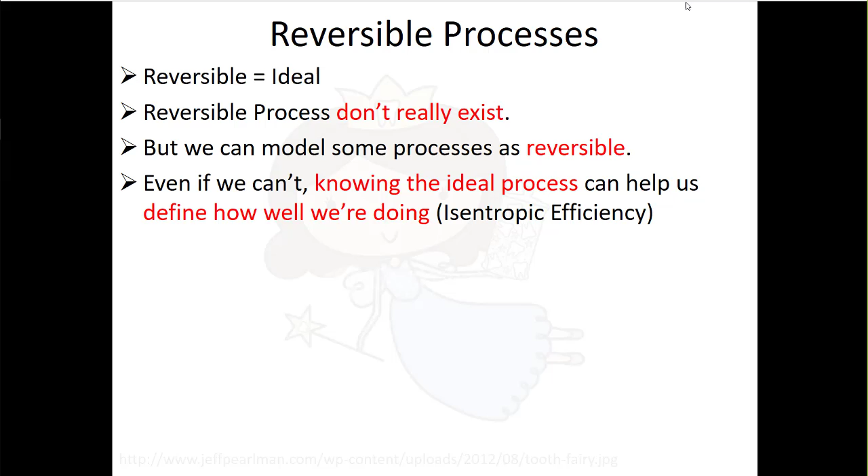We talked about this before, and we'll go through an example today where you might not think, when you calculate your thermal efficiency of your heat engine, that you're doing all that well, but you can't compare that number to 100%. You have to compare it to the ideal or the Carnot efficiency, which we'll talk about today.

We've been talking about the second law and how ideal processes are processes where that sigma dot, or entropy generation rate term, is zero. That's the best that can possibly happen, the thing we can approach but never achieve. That's the limit of what's possible.

But real processes, which are irreversible, have irreversibilities, things like friction that cause energy losses, and that's represented in the second law by this sigma dot term being positive. So anything that can happen in real life has a positive entropy generation rate.

In the last class, we talked about how that doesn't necessarily mean the specific entropy of the working fluid in your system is increasing, because you have to think about the entropy of the whole universe, which also includes the entropy accounted for in that heat transfer term.

And we talked about the potential difficulties with that heat transfer term, that you need to use the right one. It's the same heat transfer term you would use in the first law, but remember, it's Q dot over T.

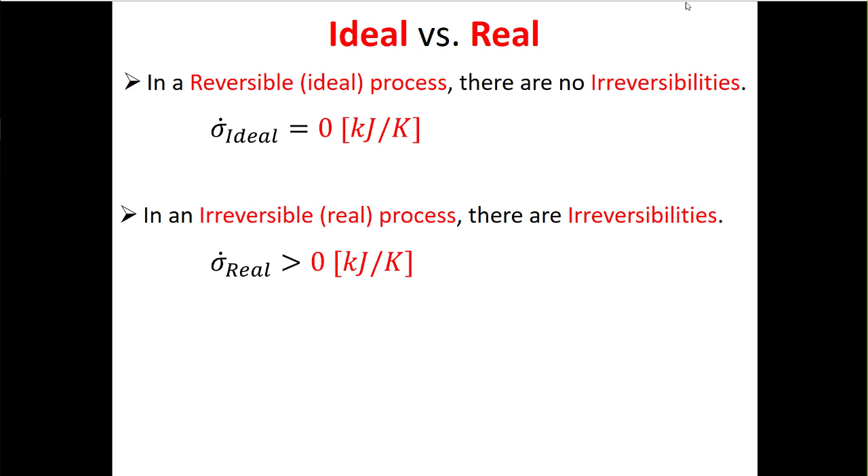There's two things you have to remember about that temperature. The first is that it's the temperature outside of your system. The second is that since it's not a temperature difference, it has to be in Kelvin or in Rankine.

So we talked about this idea of thermal efficiency, which we'll explore a bit more today. This is the idea that when you have a heat engine, you're trying to turn that input energy, which is heat, into another kind of energy, which is mechanical power. When we think about power plants, this is a spinning shaft attached to an electrical generator.

And the question is, how much of that input heat energy actually made it into this mechanical energy, this spinning shaft. So we can look at that.

This is actually W dot net over Q dot in. But if we do a first law analysis on the whole system, we can transform that into 1 minus Q dot out over Q dot in.

I can show you that when we do the example today. So this is going to be some number less than 1, because Q dot in is the biggest number in the problem.

And Q dot out, remember Kelvin and Planck told us, yeah, you can have a heat engine that's going to run for long periods of time in a cycle, but you have to cool that engine, otherwise it's going to fail. Like I said, unfortunately sometimes we see that on the side of the road where somebody's pouring a water bottle over their engine because they lost their radiator fluid or something.

Now there's a special case here. So this equation we can always use, this should say real and not ideal. But for ideal processes, we can make this substitution that a ratio of heat transfer rates can be replaced with a ratio of temperatures.

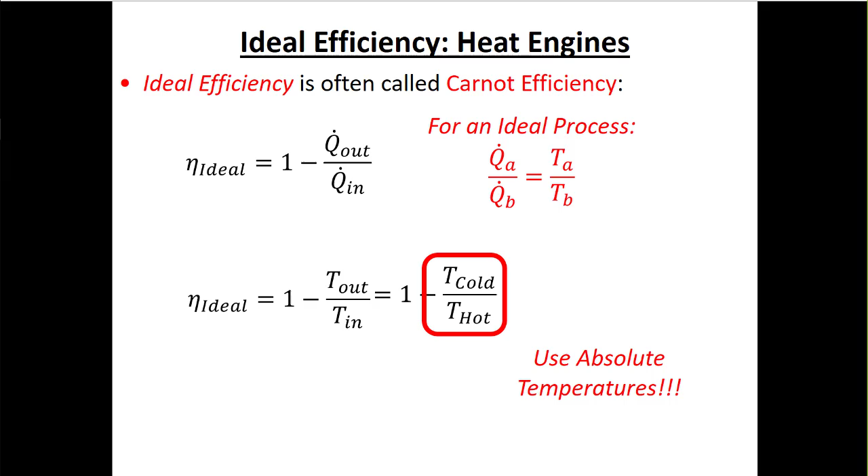We also talked about this idea of coefficient of performance, that we can use a similar methodology to look at devices that work in the opposite direction as heat engines. Heat engines were putting in heat and getting out work. Whether you're talking about a heat pump or a refrigeration cycle, the input is the work. You plug your air conditioner into the wall, and the energy benefit, the thing we're trying to do, is move heat either out of the cold place or into the hot place. So we're trying to move the heat in the opposite direction that it would go normally.

Now, you can remember, if you want, which Greek symbol goes with which. For heat pumps, we use gamma, and for refrigerators, we use beta. But if you want, you can always just write COP, that's coefficient of performance. The way that I remember this is refrigerator starts with the letter R, and if I squint enough, beta kind of maybe looks like an R. It certainly looks more like an R than gamma does. So that's how I remember it. It's maybe not the best way, but that's what I do.

Now here, because the energy cost is the net work, you would start with Q dot hot minus Q dot cold, but then we're making the Carnot assumption here, so these become temperatures. So this is the work term, and then for the heat pump, the energy benefit is heating up the hot place, so we put the hot temperature here on top. In the refrigerator, the benefit is cooling down the cold place, so we put the cold temperature on top.

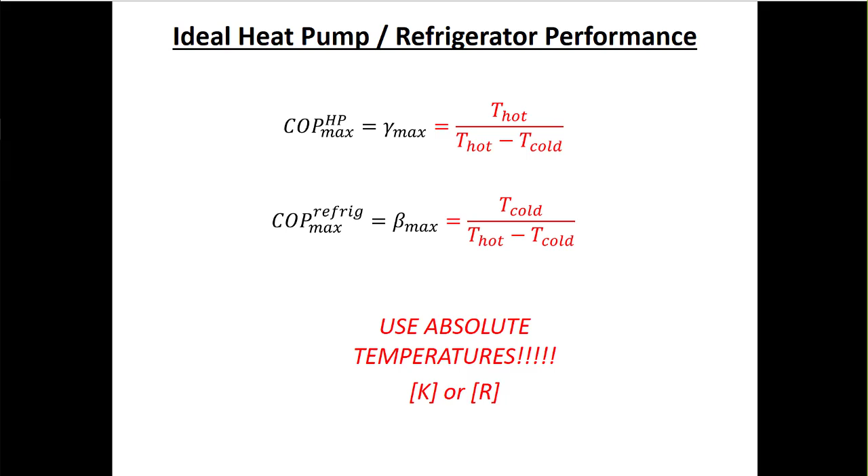So that's kind of just an overview of what we did last class. Now today, we're going to start to put this in practice, putting all the pieces together. Certainly as we get past the second midterm, we're going to start to look at cycles.

So I've been making this promise that what we're going to do in this class is really cool, because we're going to start to look at nuclear power plants and coal power plants and airplanes and all this cool stuff. And the way that we do that is by analyzing cycles like this, where we stack a bunch of thermodynamic processes together in series. So this is, I guess, the most basic version of a coal-fired power plant, and it's got 4 different components.

Remember, it's a heat engine, so we got to add heat. So here's where you're actually burning the coal. But there's this tube that's got water in it, and we're adding heat from this burning coal, and it's boiling this water, making it water vapor.

And that water vapor then goes into a turbine, because we know that there's this factor of 1,000 difference between the specific volume of liquid water and steam. So the steam wants to take up lots more volume than the liquid water, so it wants to expand.

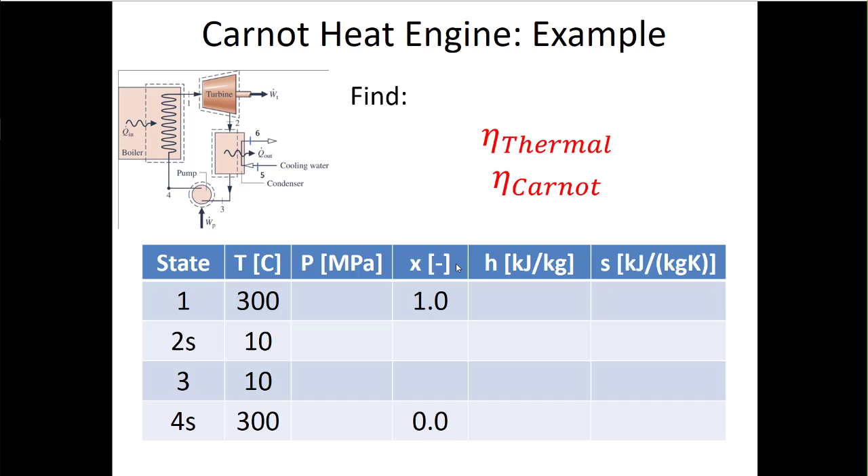So what we're asked to do is find the thermal efficiency of this system, find the Carnot efficiency of this system, and I'll also go through how we draw a TS diagram for this whole cycle, because that's going to start to be important for us.

Now, I won't do that in PowerPoint today. Today we'll go through this just in Word, right? So you'll see me actually work through the problem.

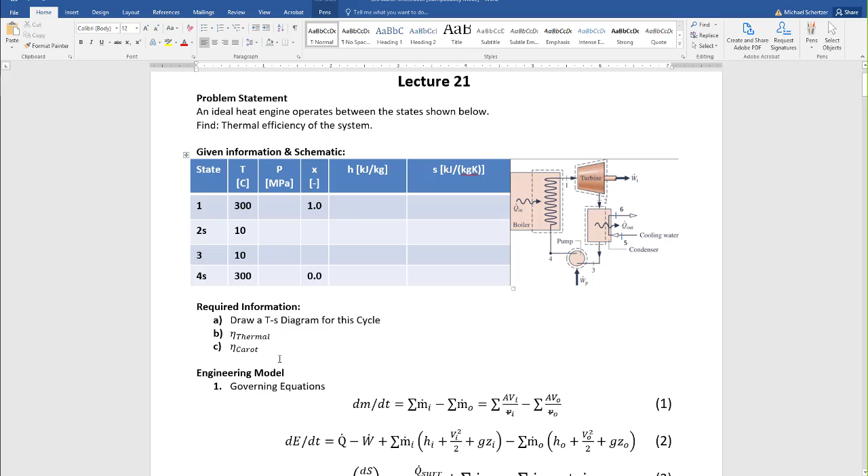Right, so this is the same information, we know some stuff here. So here I've got a state table with some information. I look here, I like state 1 because I have 2 independent intensive properties. Temperature and quality are always going to be independent. State 4S, I like this one too because it's also going to be 2 independent intensive properties. So I know I could fix those 2 states, but I got 4 states here.

So for now, let's just say that I look at this like it's an exam. I look at this and I'm like, oh my, I have no idea how to fix these states. But that's okay. Dr. Schertzer told me, if you don't know what to do, try to solve it symbolically. So we'll go through this symbolically first, and I guess first we'll draw the TS diagram, because then maybe that'll help us figure out what to do with fixing the states too.

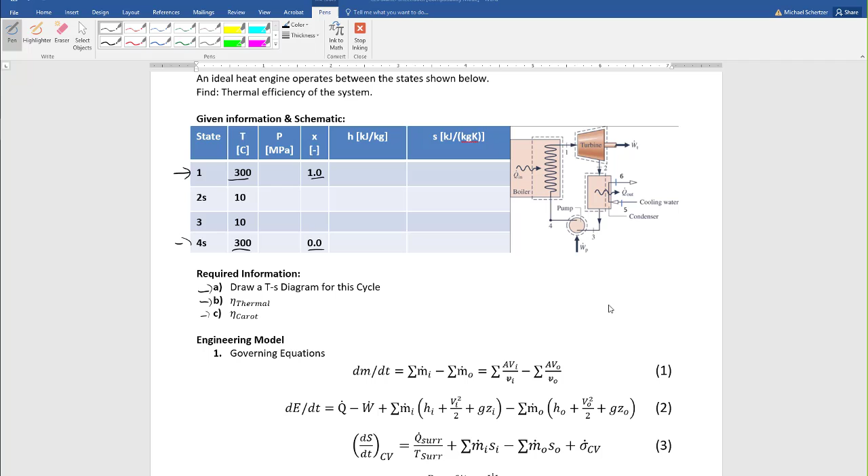Then we'll get equations for the thermal efficiency and the Carnot efficiency. And then if we have time, we'll fix the states and we'll get numbers. Now you can find those same numbers just in the lecture online. I think even in the Thermo Short, I have all the data there. So if you want to spend 10 minutes, if we don't get enough time, you can check that out too. 5 minutes if you run it at a higher speed.

So the first thing we want to think about is, what are the governing equations? So these are all the governing equations that we kind of know for open systems and cycles. So here we have conservation of mass, conservation of energy. We learned about the second law. We know something about thermal efficiency now, and Carnot efficiency. One thing that maybe I didn't mention yet.

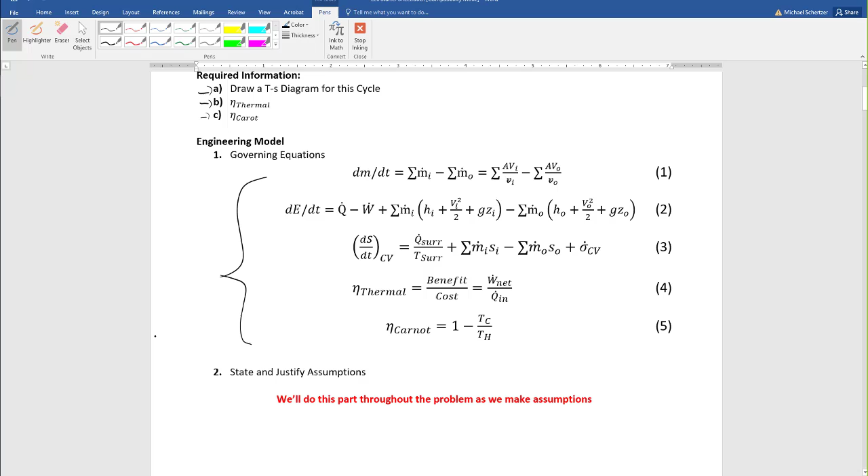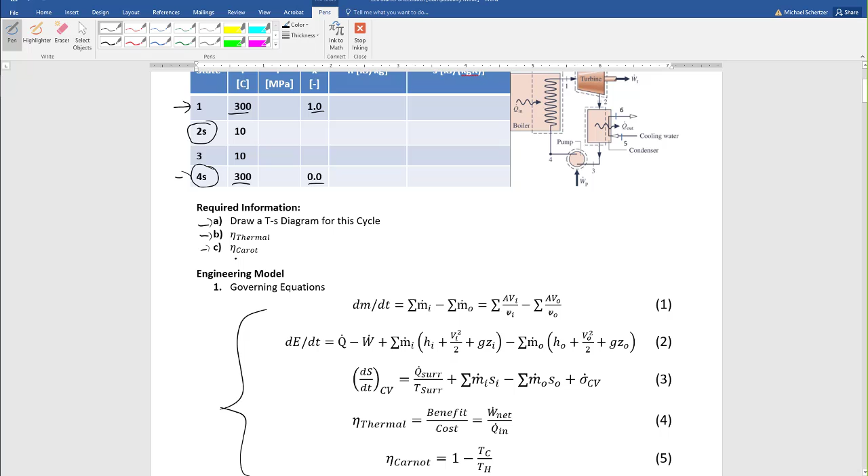Oftentimes when we don't have enough information on the state table to find everything, there's something about the process information that we know. So here there's a bit of a hint, because this says 2S and 4S, which suggests to us that they're isentropic. We'll go over what that means when we get there. But it also tells us that this is an ideal heat engine. So that must mean that for all processes, sigma dot is equal to 0, because for the whole system to be ideal, all of the processes must have sigma dot equal to 0.

So we can start. Now, this is pretty common on an exam.

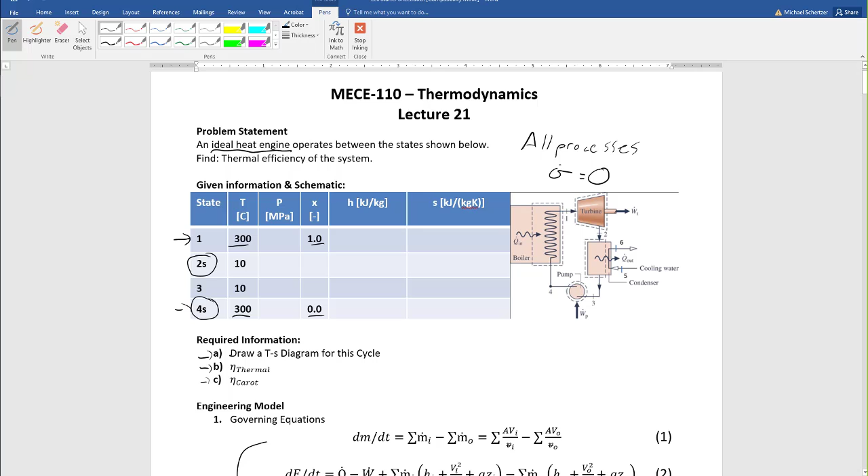You might be asked to draw a TS diagram for this whole system. So we'll start there, and I cheated a little bit because I already started here. The first thing when we draw a TS diagram, the question we have to ask ourselves is what's the fluid? The reason we ask is because if it's water, or maybe some kind of refrigerant where we're boiling it and condensing it, then we need to draw a vapor dome. But if it's an ideal gas, we don't draw a vapor dome. So here we know that the working fluid is water, so we have this vapor dome.

Now from here, I can see that two of my states, state 2s and 3, are at 10 degrees, and two of my states are at 300 degrees. So I've got my TS diagram, I drew my vapor dome. I think I cut off some of this table, but 300 is still on. This is a two-phase table, basically the same one you'd see in A2, but this is from the FE handbook, so it looks a little different, but it's the same table with temperature on the left, and 300 is on this graph. So that means we're not above the critical point. I know that 300 is over here, and 10 degrees is obviously less than 300. So this is not to scale, it's just some sketch, but that's okay.

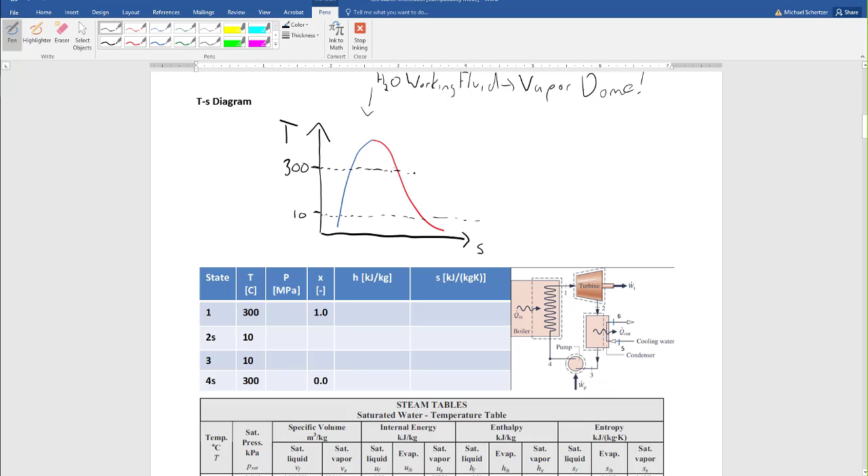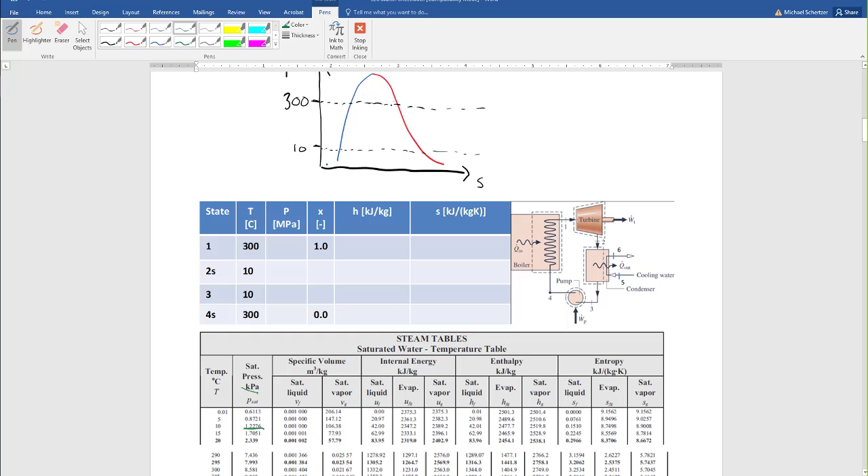So I know that I have these constant temperature lines here. Now, I could also draw constant pressure lines if I wanted to. So I could see that for 10 degrees, the pressure would be, this is in kilopascals, so 1.23 kilopascals we'll say. So this is a constant pressure line if I wanted this information. That's not too surprising, right? Because we know that water boils at 100 degrees if we're at 101.3 kilopascals. So here, because water's boiling at 10 degrees, well, we must be less than that 1 atmosphere.

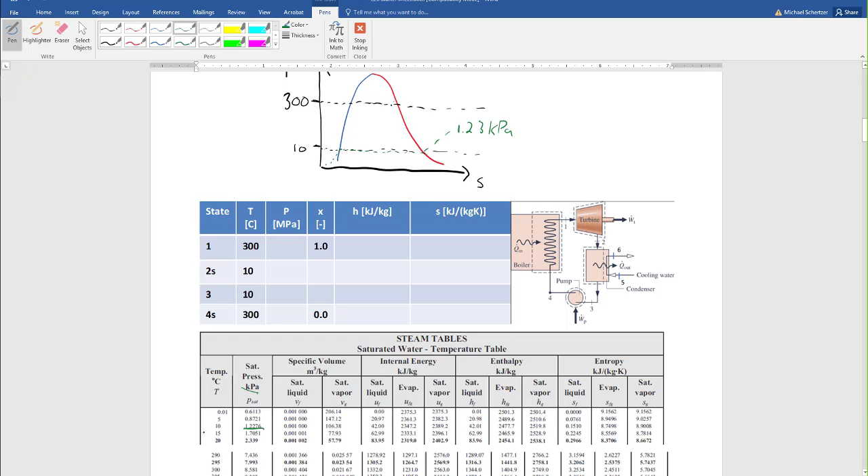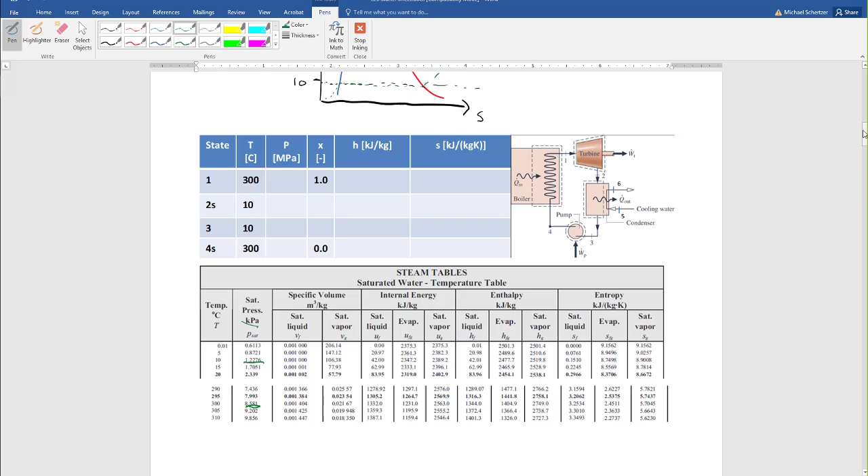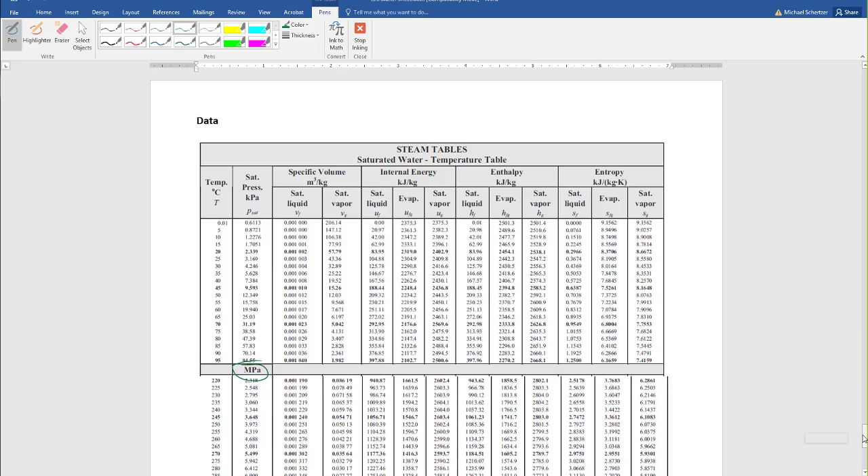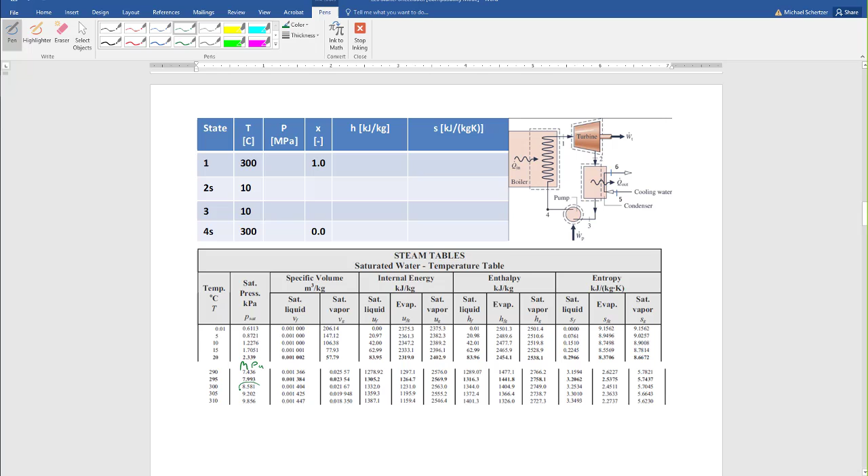Now, if I go down to 300 degrees, then this means that we're at 8.5. Oh, I think I cut off the header here. I think that this now becomes, sorry about that. I think I got it down here. This becomes megapascals once we're over 220. So I'll write that back up in my table. So this now becomes megapascals. So this is 8.58 megapascals. So here, if I wanted to draw this one, I could do this. So this is 8.5 megapascals. Which again makes sense, it's bigger than 100 kilopascals anyway.

Now there's 2 points I can put on here for sure. So it tells me state 1, which is going into the turbine, is at 300 degrees and 1 quality, so I'm right on the red line. This here, this is state 1, going into the turbine. The other state I know for sure is state 4s, coming out of the pump, is also at 300 degrees, and now it's right on the blue line. So here, as I go through the boiler, I can see that my process is going from state 4s to state 1. This is going through the boiler, so what we're doing here is we're adding heat.

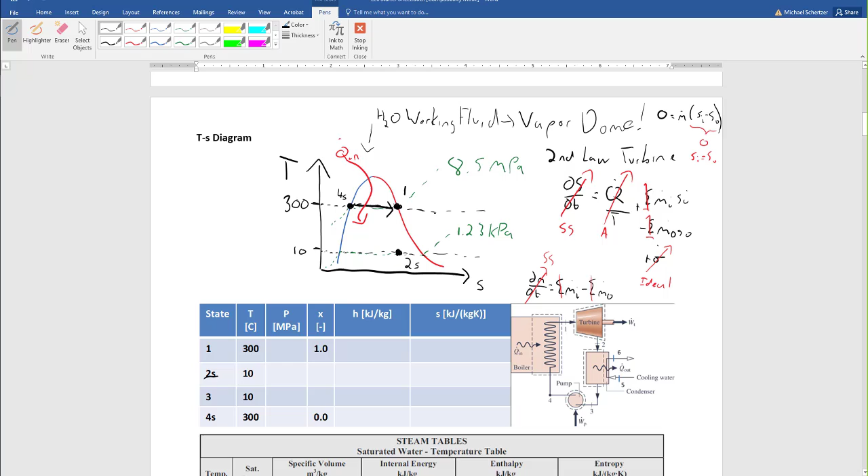Isentropic means that the process has constant entropy. And that's what we mean when we say 2S, right? So here, this state, 2S, has the same specific entropy as state 1. So now I'm going to go from 1 to 2S.

This is a vertical line down because the process is ideal. And then it was at steady state, adiabatic with one inlet and one outlet. And that means that the specific entropies must be the same.

Now, what's the purpose of the turbine, right? The purpose of the boiler was to add heat. The purpose of the turbine is to produce power. So as we go from state 1 to state 2, we're generating power.

I could do the same analysis here if I just wrote the word pump here. I could do the same analysis. The pump is also at steady state. We're going to assume that it's adiabatic, that it has one inlet, one outlet, that it's ideal, right? And this same conservation of mass applies.

So even though 4S, that's the outlet, right? What we'd see is that state 3, S3, is the same as S4S. So this is also a vertical line. Here, we're going to be putting power in.

This is W dot pump, W dot turbine, right? So here we're putting work into the system or power into the system. And then as we go through the condenser, which goes from state 2S, sorry, this is state 3, to state 3, here we're going to be rejecting heat from the condenser.

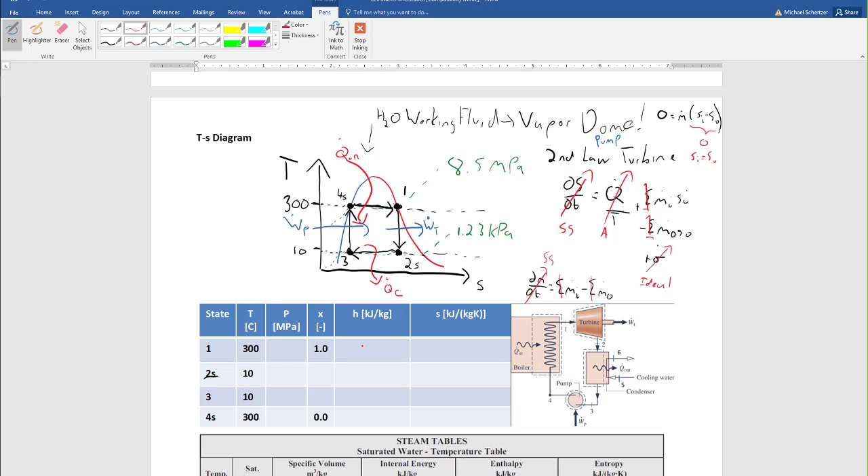So because it's compressible, right? So you want like a nice even load on the pump. So when you get these compressible pockets, then the load kind of varies all over the place. Plus, if you have these bubbles in there and you've got your fan blade spinning around, it can cause damage to the blades in the pump, you know, the impeller. So that's my understanding anyway.

Right, so here, right, we're running around and around in this cycle. And the reason we call this a cycle, right, is because the very first state that we look at is also the very last state that we look at, right? The beginning state in the turbine is the end state of the boiler.

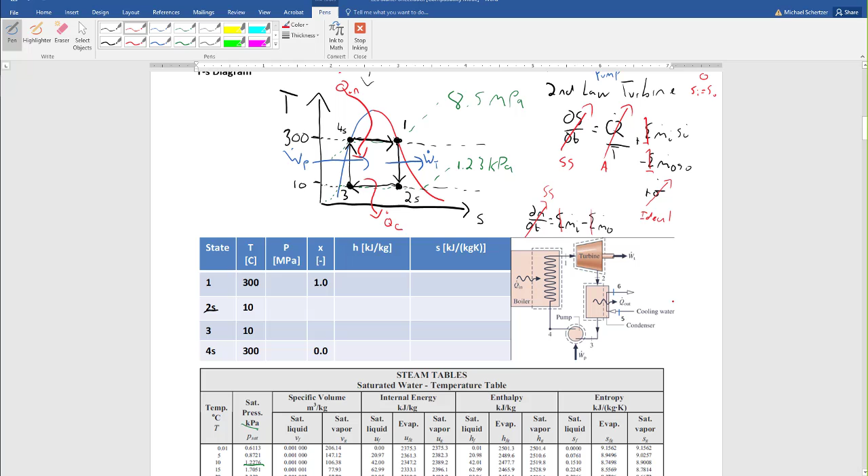So now we did this, let's try to get at least a symbolic solution for the thermal efficiency, right? So now we need symbolic solutions. And we've already talked about a couple of these, right? So where are my control volumes? I have 4 control volumes, right? So that means I'm going to have to do different analyses, right?

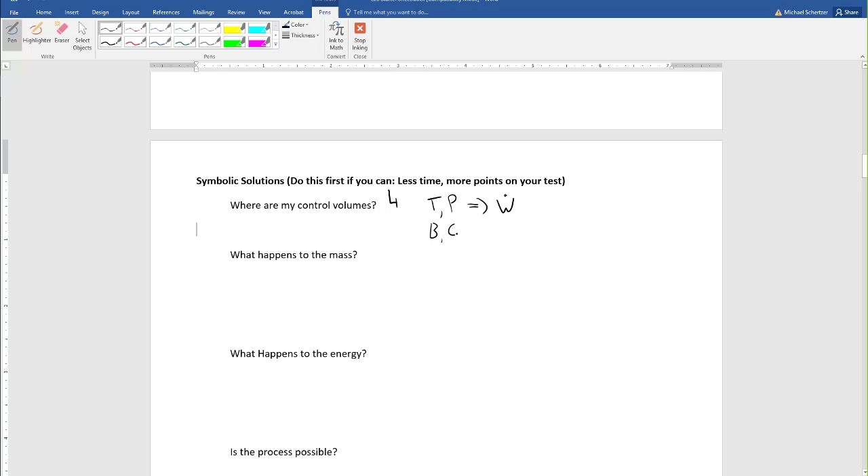I've got the turbine and the pump. These ones are going to be interested in generating power. And I've got the boiler and the condenser, and those ones will be interested in heat transfer rates, right? So there's 4 different control volumes that we might have to look at here, right?

Now, there'll be a different kind of suite of assumptions that goes with these different components, right? So this is why, sometimes a test problem will say, what are your assumptions right at the beginning? And sometimes it says track your assumptions throughout. And I'm always a big fan of tracking your assumptions throughout. That's why I tell you to start with the governing equations, because then it's very easy for you and for me to see what your understanding of the problem is, right?

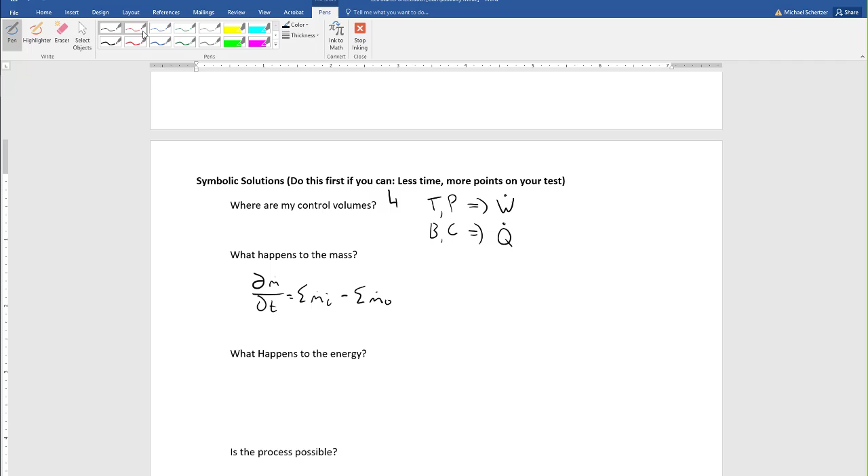So now as we go to what happens to the mass, we would do this for all of the systems. We would say that dm by dt is equal to the sum of m dot in minus the sum of m dot out, right? But for all the components, they are at steady state and one inlet, one outlet. So for every component, we will get the same answers. So all components will say m dot in is equal to m dot out.

So here, if I just draw it, right? Here's my turbine, a condenser, a pump, and a boiler. We've labeled these states 1, 2s, 3, 4s, right?

So here, if I look at the turbine, the inlet to the turbine is the same as the outlet of the turbine. The mass flow rate here is the same as the mass flow rate here. But because these are chained together in series, the outlet of the turbine - this is the turbine, this is the condenser, this is the pump, and this is the boiler - the outlet of the turbine is the inlet to the condenser, right? And the outlet of the condenser is the inlet to the pump, right?

So what the turbine is telling me, from conservation of mass, is that m dot 1 is equal to m dot 2s. But what the condenser is telling me is m dot 2s is equal to m dot 3. And the pump tells me m dot 3 is equal to m dot 4s. And the boiler tells me that m dot 4s is equal to m dot 1. So all of these mass flow rates are the same. Do you see how that happens? Does that make sense? Right, so there's only one mass flow rate.

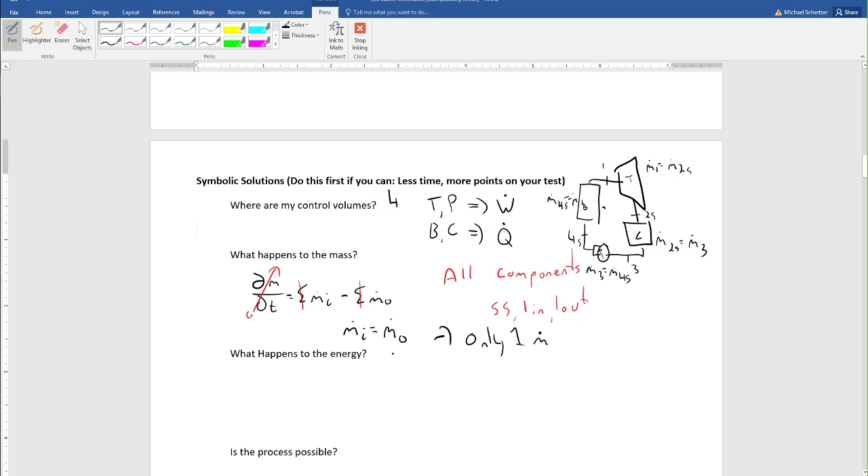So now what happens to the energy? For our conservation of energy, we're going to have dE by dt is equal to - this is a metric problem - Q dot minus W dot plus the sum of M dot in, H in minus H out. Oops, that's not how that goes. Jumping the gun here. Plus, this is V in squared over 2 - there's no GC here because it's not an imperial problem - plus GZ in, minus the sum of m dot out, H out, plus V out squared over 2 plus GZ out.

So over here, well, I'm not going to skip too many steps, but we know that for the turbine and the pump, they're going to have the same assumptions. So for the turbine and the pump, they're steady state. They're both adiabatic. They're both one inlet and one outlet. And then we're going to say that the change in the kinetic energy is approximately equal to 0, which is approximately equal to the change in the potential energy. So this is going to go away, and this is going to go away.

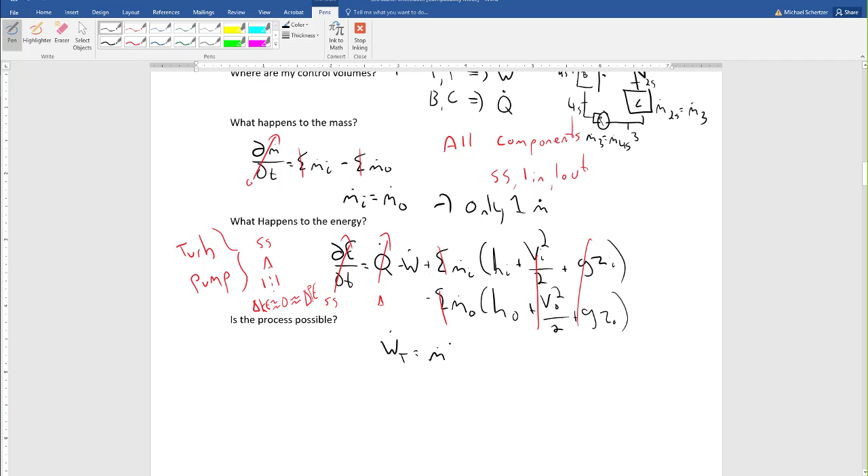So then I know that W dot for the turbine is going to be equal to M dot times H in minus H out. But here I see the inlet to the turbine is state 1, so this is going to be H1 minus H2S. And I also know, so this is for the pump, it's also going to be that W dot pump is going to be M dot times H in minus H out. But for the pump, the inlet is state 3 minus state 4.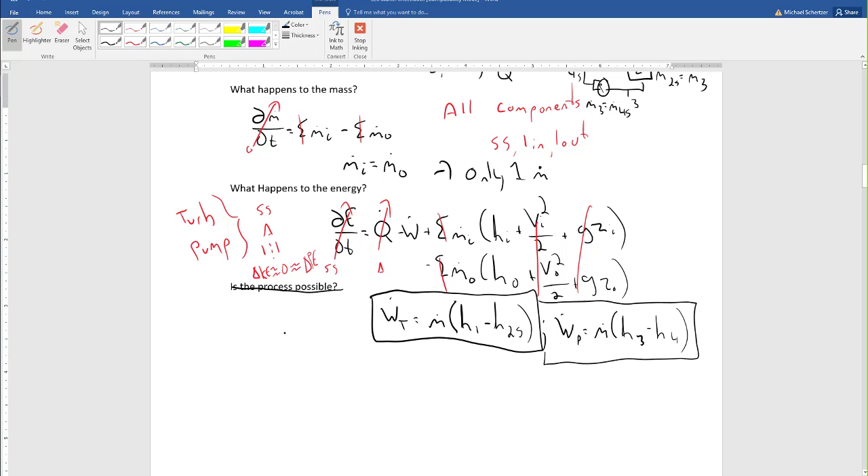So here's one equation that I might want to use. Here's what happened when I did the first law on the pump. Now for this, we'll cross this out for now. For the boiler and the condenser, we're going to look at it a little bit differently. Well, let's just do the boiler, because that's the only one we're going to need here. But if we have some time, I'll come back and show you what you might be able to do with the condenser. So the boiler is over here, right?

It's also going to be steady state. So the boiler is going to be steady state. It's not going to be adiabatic, because the whole point is to generate heat, right? So it's going to be passive. There's no fan blades. It's also going to be 1 and 1, and it's going to be no potential and kinetic energy changes.

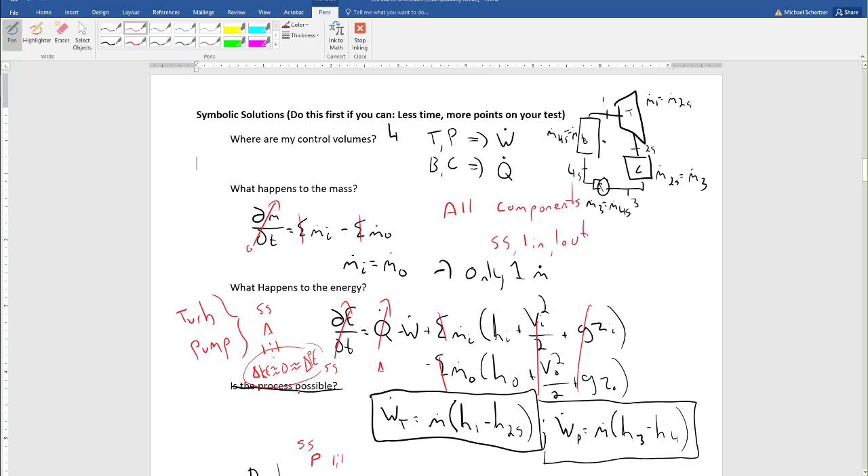So if I did the first law on the boiler, I would say dE by dt is equal to Q dot minus W dot plus the sum of M dot in, H in plus V in squared over - still metric - 2 plus GZ in, minus the sum of M dot out, H out plus V out squared over 2 plus GZ out. But the assumptions I've made here are that it's steady state.

The heat transfer term survives, but the power term goes away. We'll call this passive. One inlet, one outlet, no potential and kinetic energy changes. And now what I'm going to get is Q dot from the boiler is going to be equal to M dot times H out minus H in. So that's, hopefully, we're starting to see that's the expression we'll often get if we make these assumptions and we're talking about heat transfer. But H out - so this is going to be M dot times H1 minus H. So H out was 1, state coming in was H4S.

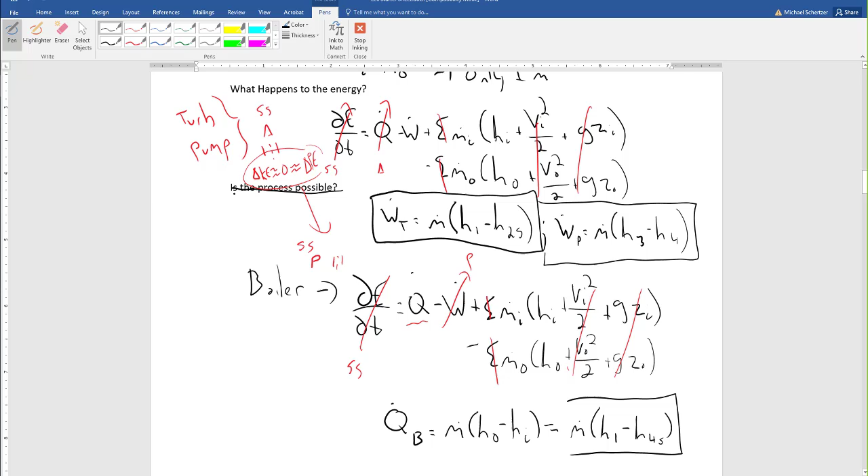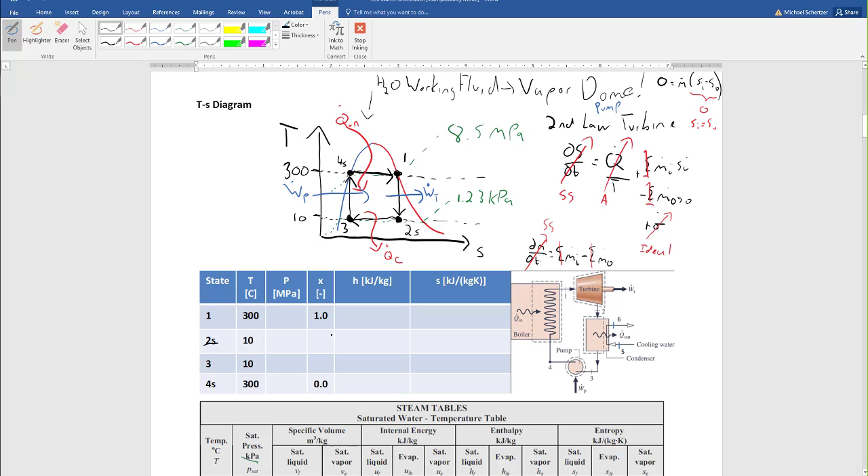Right, so I wrote here: is the process possible? That's one of the other questions we ask for these open systems. But we already did that part when we were drawing our process. We did a second law analysis on the turbine and pump to convince ourselves that the specific entropy didn't change.

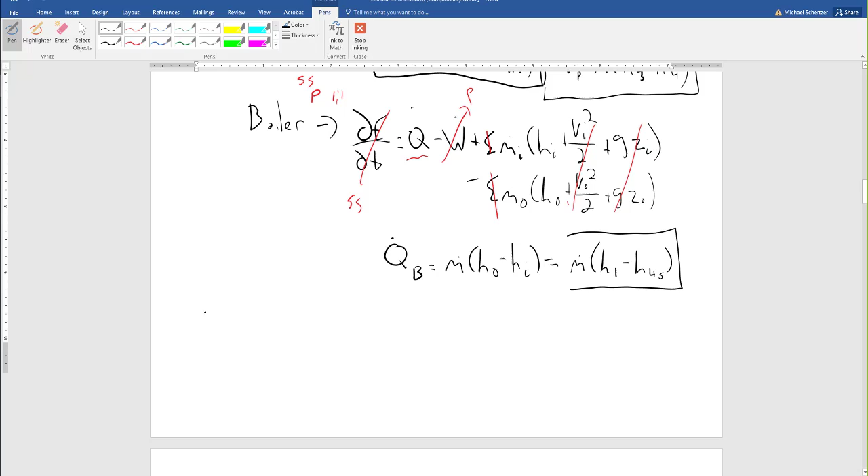So I think we've answered those open system questions pretty well. But we still don't have what the problem actually asked us for. What are we trying to find? We want to find the thermal efficiency and the Carnot efficiency. Let me give us a little more space here.

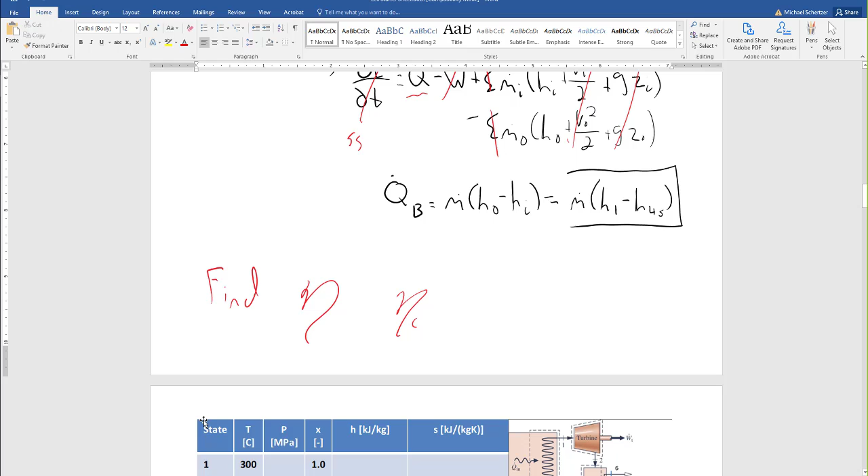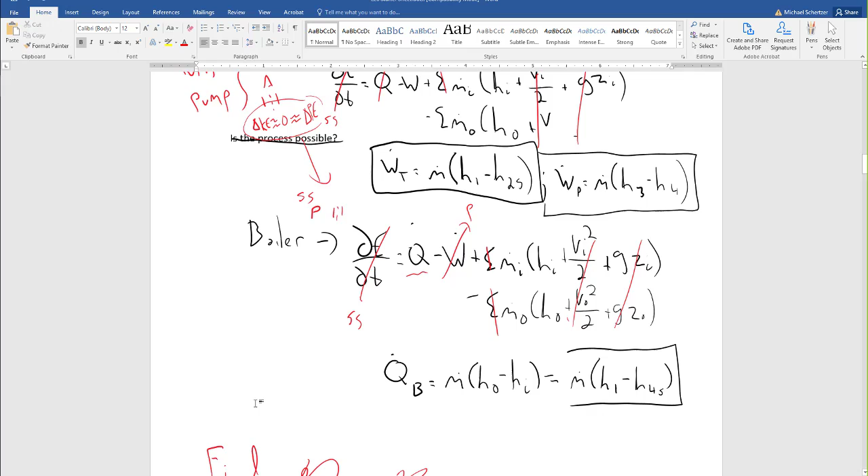See if this works. Right, so now we got to remember how to do thermal efficiency. We'll start with the thermal efficiency. If I'm trying to find the thermal efficiency, all of these system characterization terms are always the energy benefit over the energy cost.

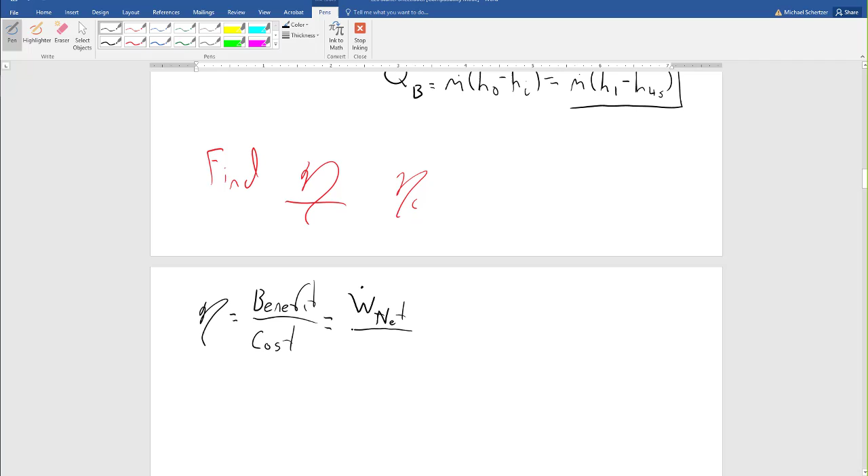So the energy benefit here, the reason we run a heat engine is to generate mechanical power - net power generated, divided by the cost, which is the heat, but not the net heat, just the heat in. That's why I only had to do the first law on the boiler. Because if we took the net work over the net heat, the answer would always be 100% efficiency, since net work equals net heat as long as we're at steady state.

So what is the net work? There's two different work terms: the turbine, which is the power producer, and the pump. So what do we do with these two terms? Do we add them together or subtract them? The textbook, this is tricky because there's not really a wrong answer - the textbook will tell you to subtract these two numbers.

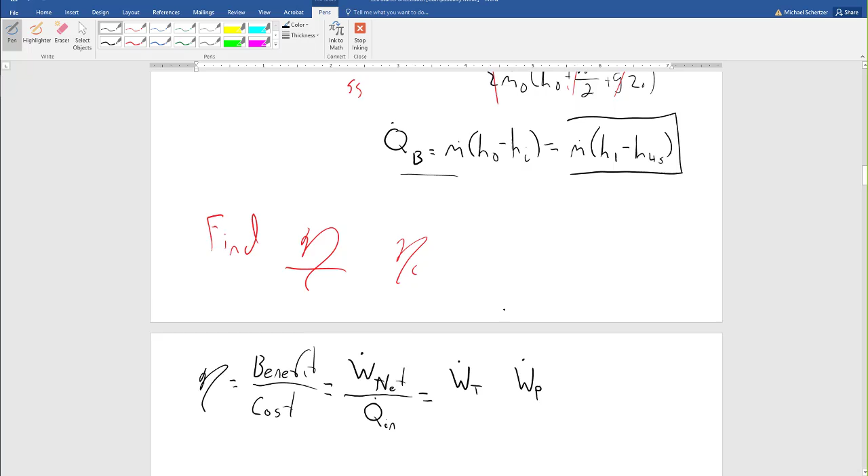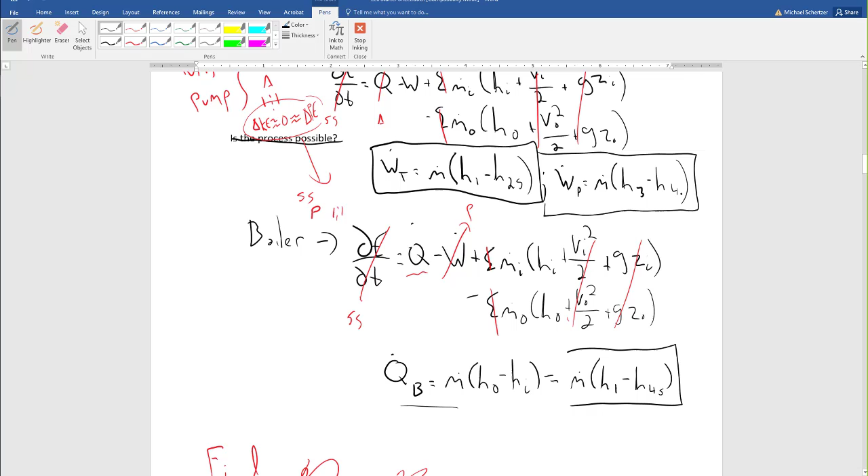But the textbook will also tell you that power from a pump is m dot times H out minus H in. I tend not to like that, because it's really telling you the magnitude of the pump power. So for me, when I'm finding the net power, I'm always going to add these things together.

And the reason I do that is because when I take these terms from the first law, the signs will deal with themselves for me. The first law is going to tell me that my turbine has positive power because that's work out, and work out is positive. The pump is putting work in, and work in is negative. So I add these things together.

And the way you check this to make sure you didn't mess it up is you look at your net power - it has to be less than your turbine power, because the pump is a cost, not a benefit. So if you add these two together and get a power bigger than your turbine power, it means you messed up the sign somewhere. Because your pump, you have to plug it into the wall - it's consuming power. And here we divide this by Q dot in.

Now the good thing is we actually didn't really know any of these things, but the good news is we don't have to know them, because we could ask you a problem like this on the exam and start with this equation. But to get these, you have to do a first law on the turbine, the pump, and the boiler, where we're adding heat. But we did that already.

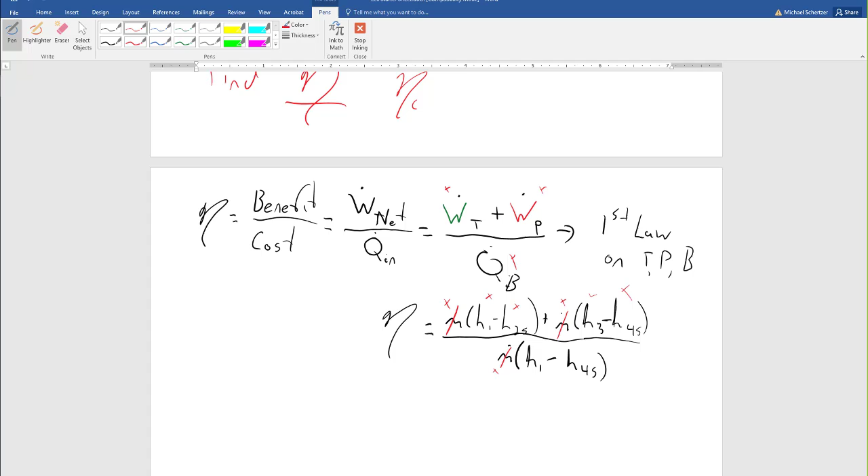So to fix this, we're going to have to fix the states. If you want the numbers here, you might have to go to the long version of the lecture, but I'll walk you through the process. So state 1, we know the temperature, and we knew that the quality was equal to 1, so this one is going to be Hg, at 300 degrees.

The other thing I'd get from this, I'll do the stuff in blue, the stuff you'd pull off the table, A2 if you were doing this from the textbook. From here, you would get H1, but you'd also want to get S1. Now why do you want to do that? Because when you get to state 2, the only thing you actually know here is T2.

But that's the only thing we know, except because we did the second law analysis, it told us that S of 2S is equal to S1. Now, when we drew this, remember we were under the vapor dome, we were coming from like here down to here, so from 1 to 2S.

We're going to look at the row for this, which is 10 degrees Celsius. We expect we have SF, and we have SG, and we expect S1 to be somewhere in between here, S1, which is equal to S of 2S.

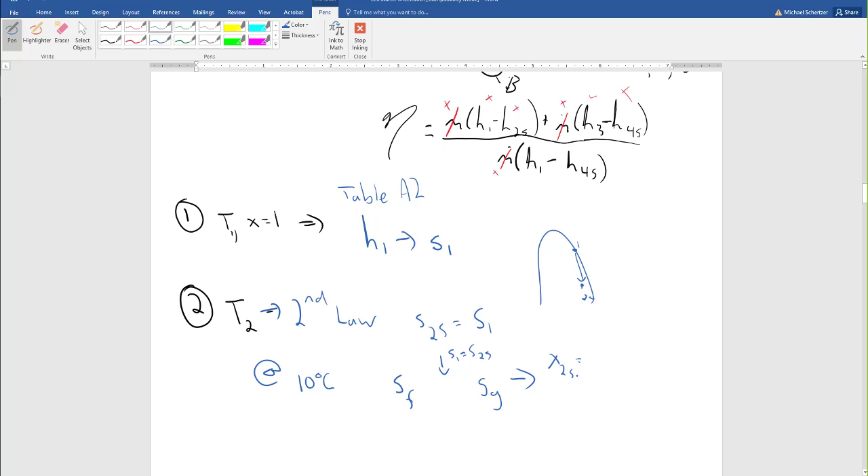So we want to find the quality for this state. We're going to use our quality equation to say that X2S must be equal to S of 2S minus SF divided by SG minus SF. This will give us X2S. In this equation, I know all of this stuff. The tricky thing here is this is evaluated at 10 degrees Celsius, not at 300 degrees Celsius. So this will give me X of 2S.

Now I get to use the quality equation again, because here what I really want is H of 2S, and that's going to be equal to HF plus X2S times HG minus HF, or HFG. Again, this is all evaluated at this 10 degrees Celsius line. So now I know HF and HG from the table, but I had to get X2S from up here. Does that make sense?

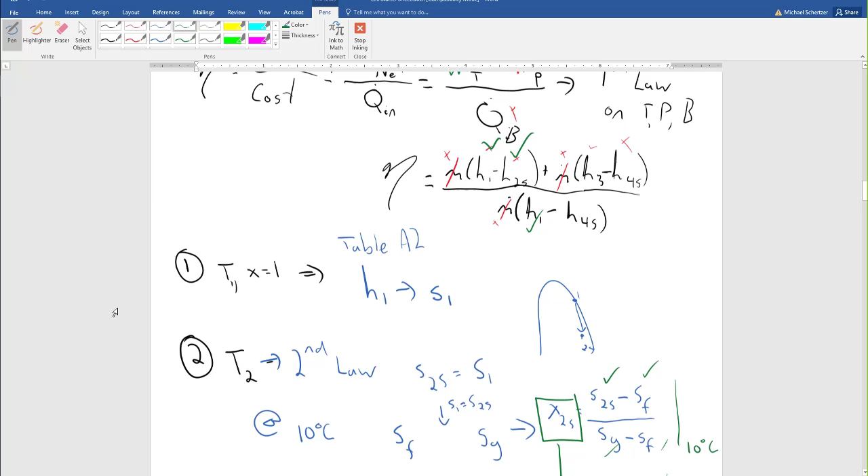So now, when we look at this, we know state 1, we know state 2S, we just need 3 and 4S. I'm going to start with state 4S, because that's the one we know. Here we were told that the temperature was 300 degrees and that the quality was equal to 0, so this is saturated liquid.

So here, now this is going to be very similar. We're going to follow almost the same process, but now S4S is equal to SF at 300 degrees, because that's the temperature for this state. And H4S is equal to HF at 300 degrees.

For state 3, from the second law, first I know that temperature is 10 degrees. And the second law told me that S3 is equal to S4S. So this is just like the process here. I'm going to find X3, which is S3, the same as S4S, minus SF divided by SG minus SF, again at 10 degrees.

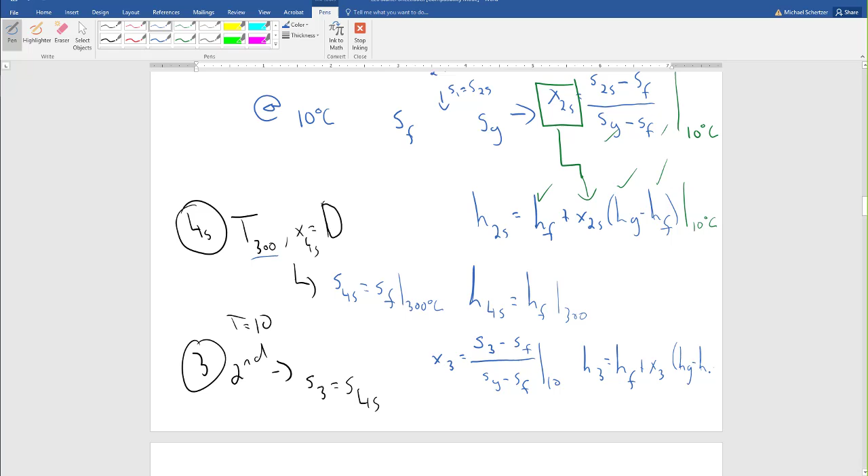And then I'm going to find H3 will be HF plus X3 times HG minus HF. So I'm going to put this value into here.

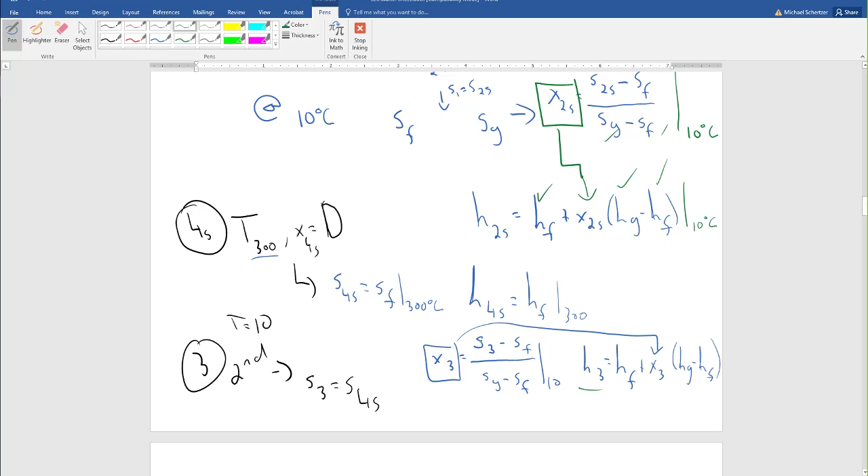Again, it might be worthwhile to look at the thermal short or the long version of this lecture that's posted in the lecture series YouTube playlist to go through the mathematics of how to do this, or in my notes that are posted online, to see how to actually fix the states and what the numbers are.

But now I have all these values. And when I put them in, the equation that I got, or the thermal efficiency that I got, was—sorry, where are we, I'm still fixing the state, I know this is very exciting—50.6 percent, or 0.506. Here I would have had to multiply by 100 to get that number.

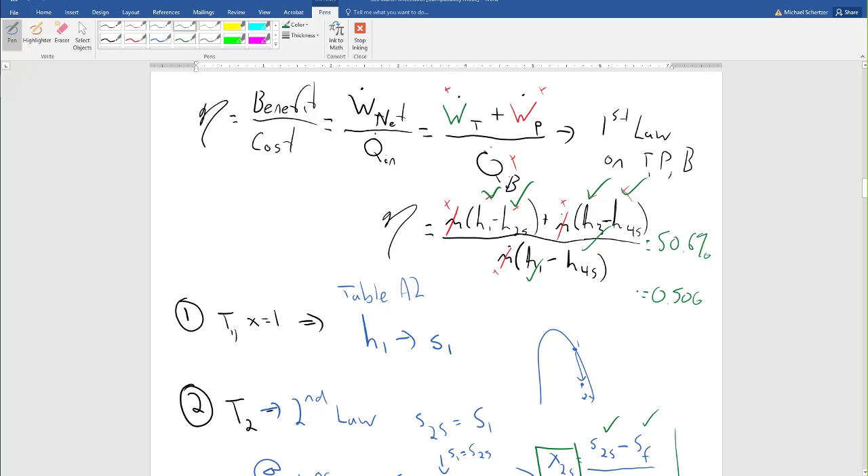Now, you might think that that's not so good. So let's compare this to the best possible performance we could get from this particular heat engine. So now we can go to our Carnot efficiency.

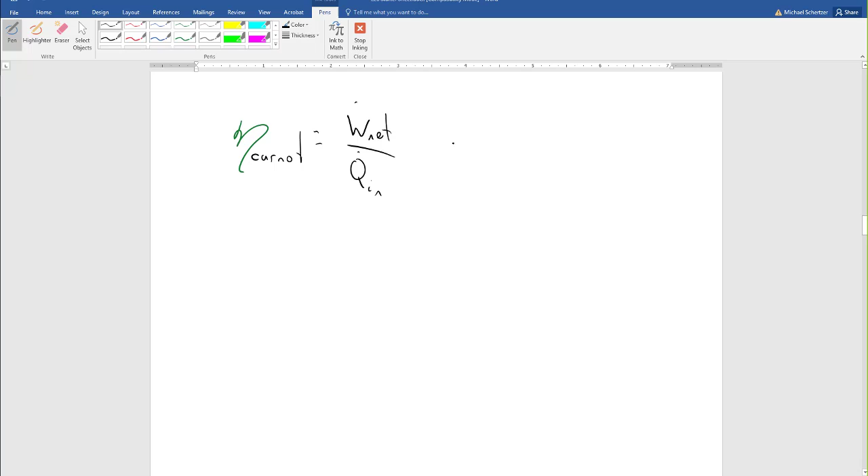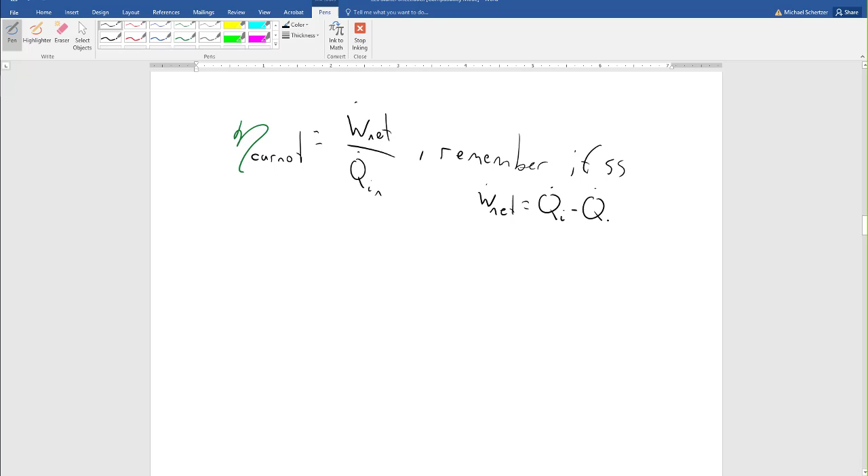This again is going to be net work divided by heat in, but we'll remember that if we're at steady state, W dot net is going to be equal to Q in minus Q out. Or we could, I think it becomes a little easier if we start to talk about these as Q hot and Q cold, because we're going to put temperatures in here. So this becomes Q dot hot minus Q dot cold over Q dot hot.

I can factor this around a little bit, and say Q dot hot over Q dot hot is 1, so this is 1 minus Q dot cold over Q dot hot. This actually, you can do this. This is true for real processes too.

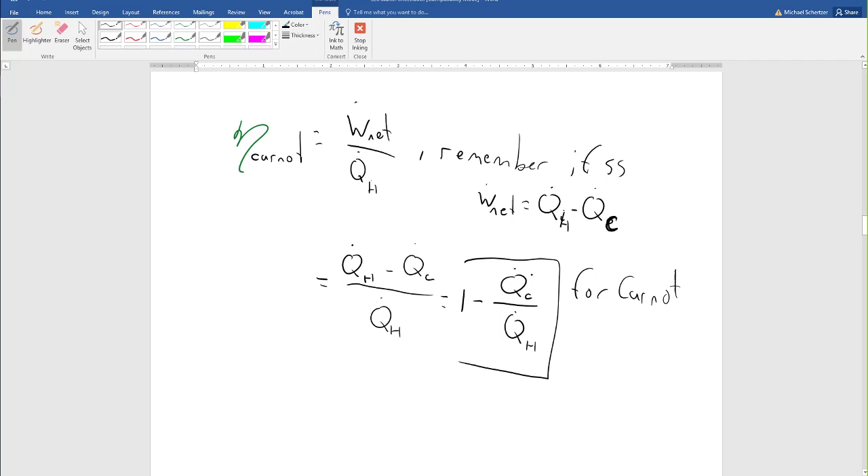But now here's the switch. For Carnot, or ideal processes, the ratio of Q dots, Q dot over Q dot, can be changed into T over T. So my Carnot efficiency could be 1 minus T cold over T hot.

Ideally, to answer this part of the problem, we would want to know the temperatures outside of our boiler and outside of our condenser. But failing that, because these things happen at constant temperature, we could imagine that the lowest maximum temperature is 300 degrees and the highest cold temperature is 10 degrees. So I'm going to still say that this is 1 minus 10 degrees Celsius over 300 degrees Celsius.

But I got to remember, because these are not temperature differences, these have to be in absolute. So now I've got to add 273 to the top and the bottom. You'll notice that'll give me a very different answer. If I did, 10 over 300 is much different than 283 over 573. And you know what's interesting is that when I do this, I get 50.6%.